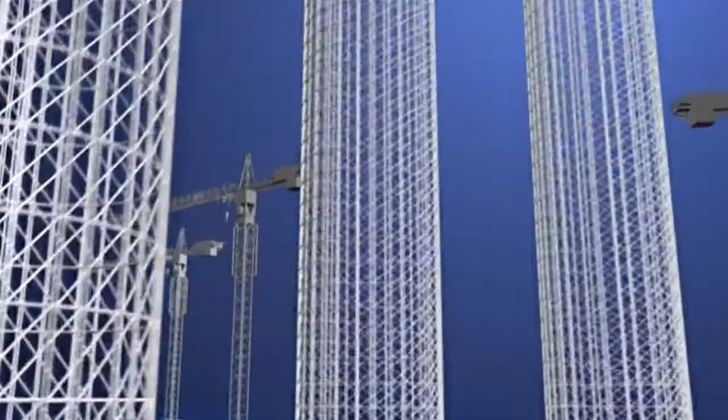Singapore, the Southeast Asian country, is smaller than New York City. The lack of space forces it to build its largest leisure and entertainment hub to date on a small tract of reclaimed waterfront land. The Marina Bay Sands. It's not one megastructure, but many. Serious challenges lie in the array of buildings that form the unique complex.

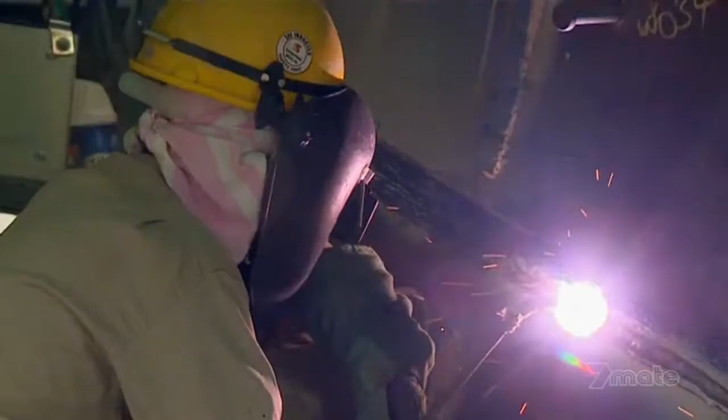3 55-story hotel towers slope at such great angles, they're in danger of buckling under their own weight. An even bigger problem is the hotel's roof. A 340-metre sky park spans its length, containing gardens, outdoor pools, and the world's largest cantilevered observation deck. But how do you build something as big as an aircraft carrier, 200 meters in the air?

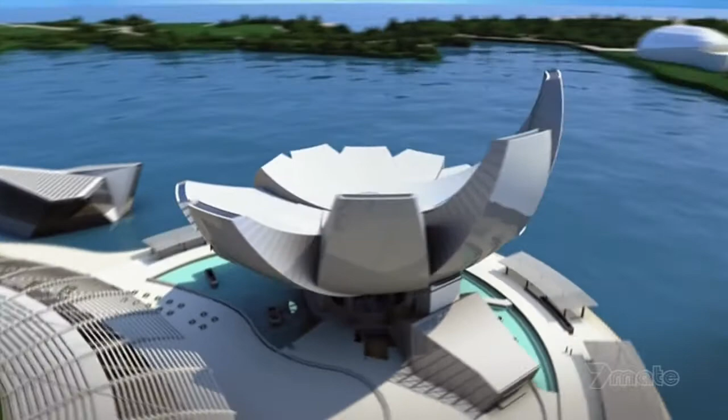In the hotel's atrium, mammoth works of art have to be somehow incorporated into the architecture. Its challenging centerpiece, a 15-ton mass of steel by a renegade artist from Britain. A 60-metre tall art science museum is designed for maximum visual impact. It will be to Singapore what the Opera House is to Sydney. Only one problem. It seems too impractical to construct. And a set of dramatic glass-encased pavilions, while themselves pose little challenge, have to be built in water.

The man behind the Marina Bay project understands the risks, but he believes that anything short of astounding will fail. Sheldon Adelson, one of the world's richest men and CEO of Las Vegas Sands Corporation. What we hope to accomplish is to change the face of Singapore tourism. So we expect a very successful development.

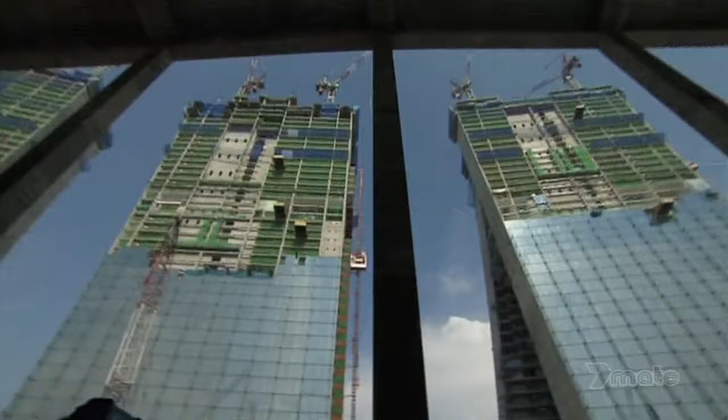That is by far the largest and most expensive single project we've ever undertaken. It'll cost about 5 to 5.5 billion US dollars. It's a lot of money. Now, I know $1 billion doesn't buy what it used to, but by any measurement, it's a lot of money today.

Adelson believes his huge investment is safe in the hands of Moshe Safdie, a world-renowned architect. Safdie is recognized for his use of dramatic curves and geometric patterns. The Marina Bay complex will be his largest and most difficult project yet. I think that architecture has to be timeless. Therefore, what it espouses, what it provides, needs to be something that has a long life.

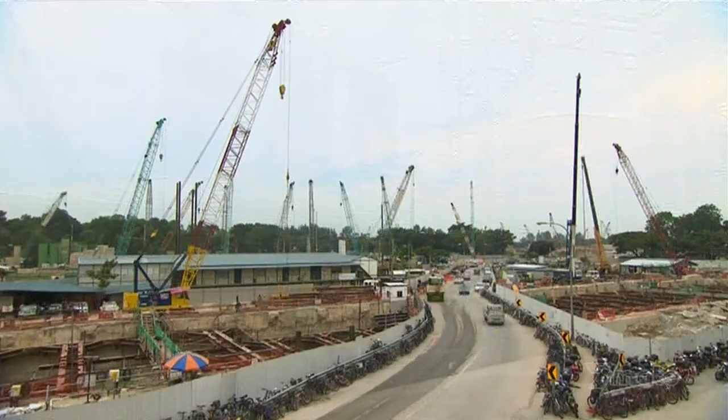What's unique about Marina Bay is all the pieces coming together. You can't think about it as individual buildings. You've got to think about it as a piece of city. It's much more a symphony than it is a sonata. On the ground, engineers are more concerned about the reality of building Safdie's vision. This is the North Retail section area. 30-year veteran John Downs is in charge of overseeing the entire project.

The design is very, very diverse, and each component of the project is totally different from the others. For a project of this size, with the planning, with the design, with the construction, you'd be expecting somewhere between 6 to 7 years. Here is basically a 3-year turnaround.

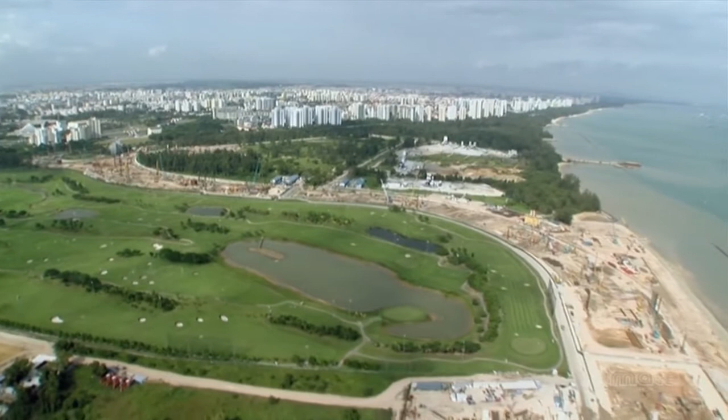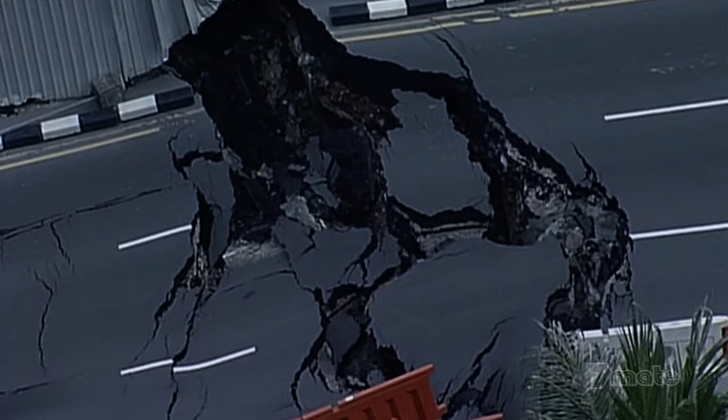Beneath the reclaimed land, which is essentially a seabed, is a dangerous layer of marine clay. Sometimes called black toothpaste, marine clay has very poor structural properties. If not given complete respect, the unstable marine clay is potentially fatal. In 2004, Singaporeans discovered the lethal consequences firsthand. A routine excavation in an underground tunnel for the mass rapid transit network causes a collapse, creating a gaping hole in the Nicoll Highway, killing 4 workers.

The ground conditions in which they were building the Nicoll Highway were not dissimilar to those we are encountering here. They had also soft clay. They had similar depths of excavation, between 20 and 37 meters. One of the big things that was learnt in the Nicoll Highway collapse was the importance of monitoring movements and the control of quality as the construction proceeds.

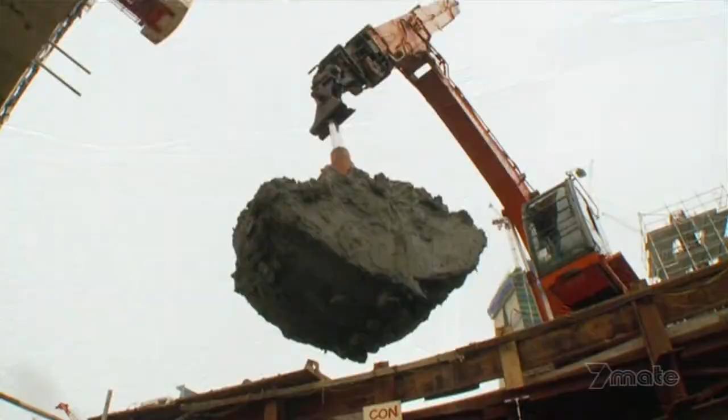Marine clay is an old foe of engineer Mike Barton. He's defeated it in the past by understanding how it behaves. The big problem with marine clay is that it is so soft that when you dig out the inside, the walls will move and potentially collapse and allow all the surrounding water in the bay into the excavation. So, before work can begin, the unstable building site needs major fortification.

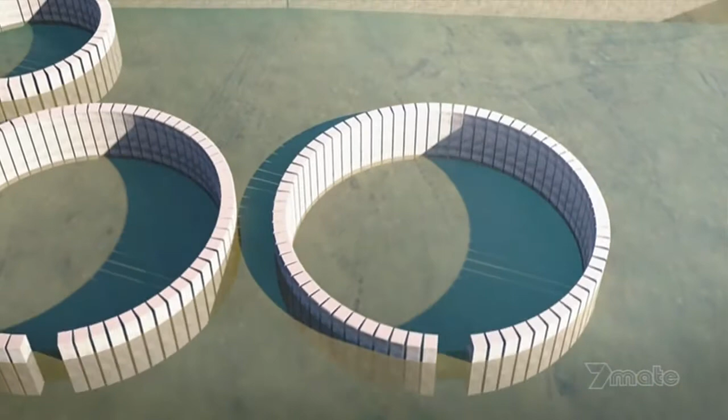To combat marine clay, engineers decide to build giant concrete walls to create stabilizing perimeters for the larger buildings, known as diaphragm walls. Up to 1.5 meters thick, diaphragm walls are steel-reinforced concrete sections, pounded 50 meters into the ground. They form watertight enclosures for men and machines to work round the clock. In just 1 year, over 4,000 meters of diaphragm walls help produce a rock-solid foundation.

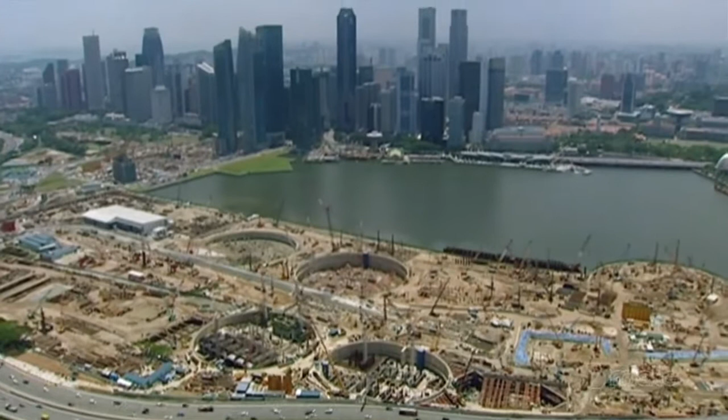The diaphragm walls that we constructed in a formation which we called a peanut formation, which is 2 circles joined together, and a donut formation, which is circular, are able to withstand very, very large forces from the marine clay without any movement. They encapsulate an area that's bigger than a football pitch that enables us to excavate very quickly and to build structure up very quickly.

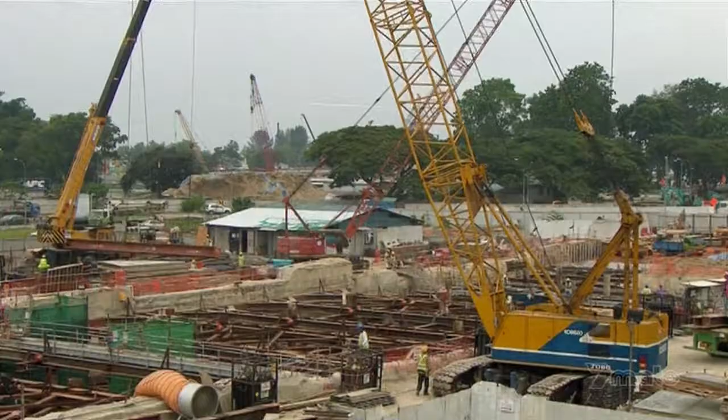Securing the footprint of the Marina Bay project has already taken a year out of John Downes' schedule. He now faces the difficult task of erecting the resort's many buildings in a space of just 2 years. Just managing the whole logistics of that, including the construction methodology, is very, very challenging for us. 1, 2, 3. To meet his tight deadline, Downes chooses the most direct solution. He hires 16,500 workers to construct every single building, simultaneously.

It's like leading a small army. So organizational excellence is key. We're just on the edge of Singapore in the CBD here, so rather than lose the contractors and the workforce to go off-site, we built our own 3-story project office. We have all of our contractors, our subcontractors here. We house our resident site staff. We have our project management team. We have our construction management team, our design management team, and the logistics here.

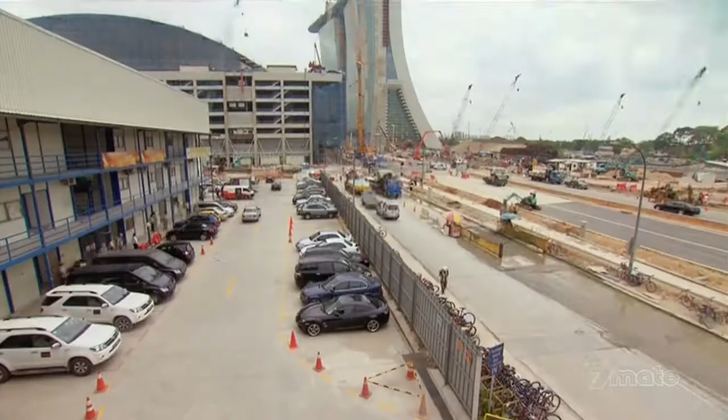Come lunchtime, the monster workforce creates another massive challenge for Downes. He responds by building one of the world's largest site canteens. We've got 13, 14 different food styles here. You can see by my shape and size that I eat here every day. I enjoy this food. So here you can see the project bakery. It has its own ovens. It's set up for breakfast. We cater for sandwiches during the course of the day. Can I take a sausage roll, please? So, freshly cooked food, straight from the oven. We stand by our products.

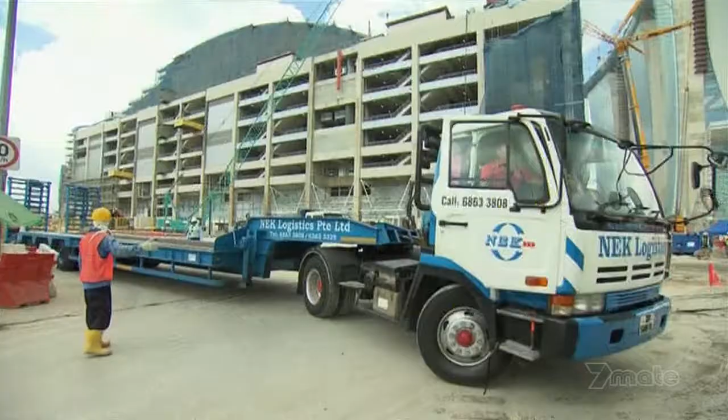The tight schedule also creates problems at the hotel towers, where engineers are already struggling with a congested site. The important thing to do is to make sure that they come in and deliver the goods straight away and then get out again. We don't want too many vehicles on site at the same time. To speed up construction and alleviate traffic congestion, engineers turn to a method that's proven itself countless times in the field: precast concrete.

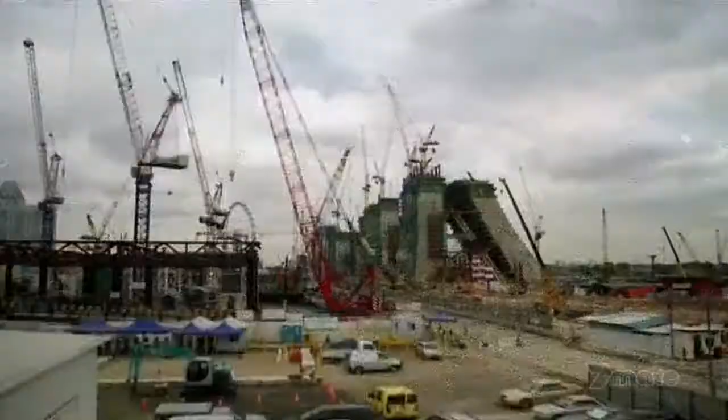Hotel walls are made on site in the thousands. And workers laying the floors are so proficient, they produce 1 floor per 4-day cycle. It's an impressive display for a conventional solution. But the structure they're attempting is anything but conventional. The key challenge of building the hotel towers is its unusual design. Unlike other skyscrapers, part of the towers slope at incredible inclines. Like a set of collapsing dominoes, the towers could buckle under their own weight if a practical building solution is not found.

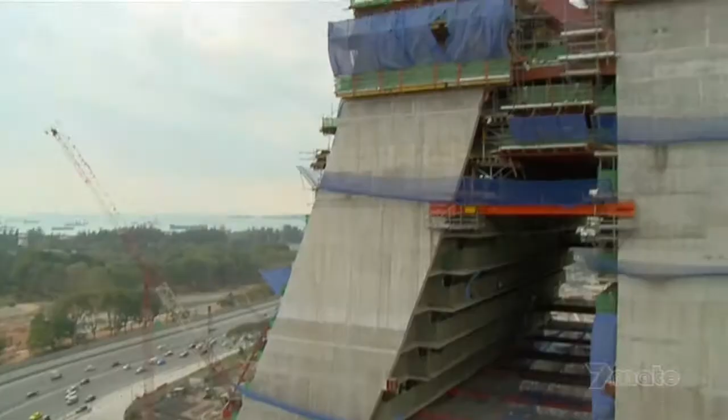It's a major concern for engineer Craig Glover. I've been in the industry for 25 years, done a wide range of projects in many different countries, but nothing compares to this whatsoever. There was nothing we could take reference from across the street, on the next high-rise, or across town. This is a new frontier. Costing a staggering $5.5 billion to build, the Marina Bay Sands could be one of the world's most expensive mistakes if engineers can't solve the tower's problematic structure.

Engineer V.C. Cheong leads the design team, and their solution comes out of left field. If you look at the configuration, it's not a straight tower. It's with a sloping leg. So this sloping leg is actually inducing a very huge external force onto the structure. We can't build it without any support. So we actually formulated a solution to prop up the sloping leg.

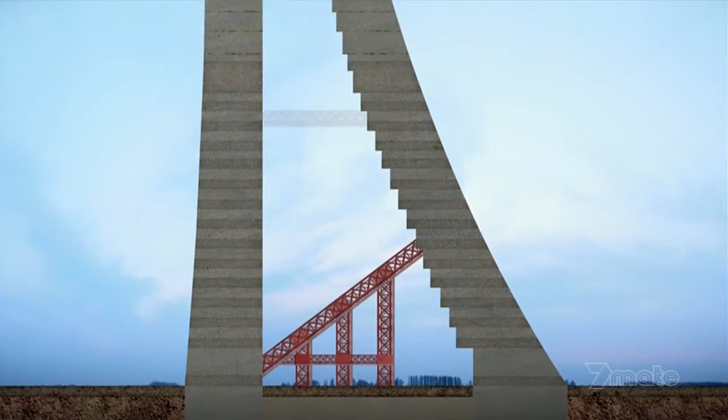Using a technique they've never employed before, engineers build large temporary struts made of strong structural steel. They prop up the sloping towers as they rise. Like a suspension bridge, high tensile steel tendons, also known as tension cables, give an added layer of support inside the walls. In theory, both the struts and the tension cables are temporary and will be removed once giant link trusses connect the towers at the 23rd floor.

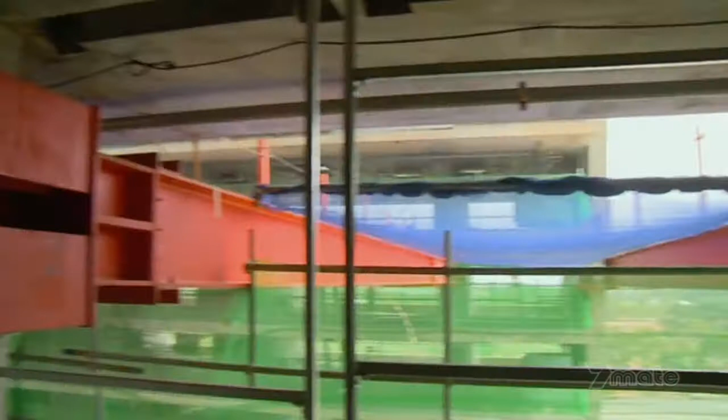The sheer weight in concrete is enough to topple the towers at level 8 if the engineer's calculations are wrong. To reduce the chances of failure, Glover and his team make a radical decision. Instead of removing the temporary tension cables in the tower walls, they make them permanent supports. I feel good it's in there because it's added strength, it's added support.

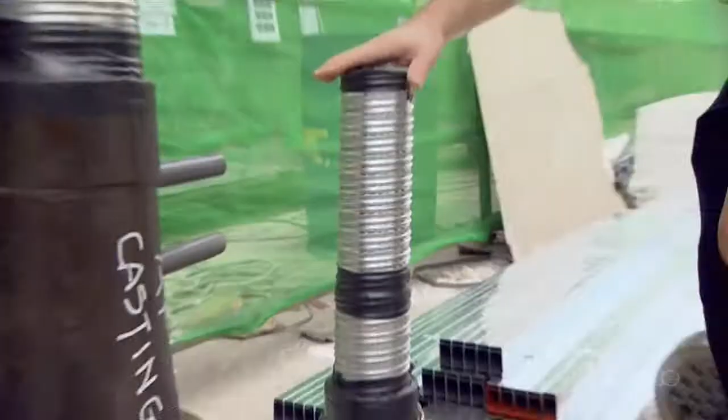We have a twined network here of high-strength steel, and what we do is we bundle these up so they form a cord with multiple strands inside this conduit. We place this conduit inside the walls prior to casting the concrete. So what we then do is once the concrete is cast, we anchor one end into the concrete. We then put a very high-strength pneumatic jack onto the collar and one by one pull these strands through and tension them up. What that does is basically pull the building back and hold it in place.

If these cables were to suddenly break or if they weren't in place, we wouldn't be able to control the self-weight as we build more and more of the building up. So it's a very important part of the actual engineering of the solution to hold the building in place until we can connect it.

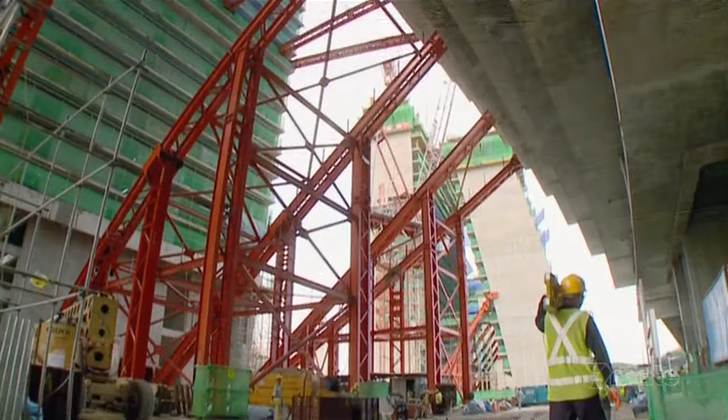Despite the team's quick thinking, the true test of their engineering decisions will only happen once the main support struts are removed and the massive link trusses installed. Link trusses are huge reinforced steel brackets that bind the towers at the 23rd floor. Once their installation is complete, they transfer the sloping tower's weight completely away from its temporary struts.

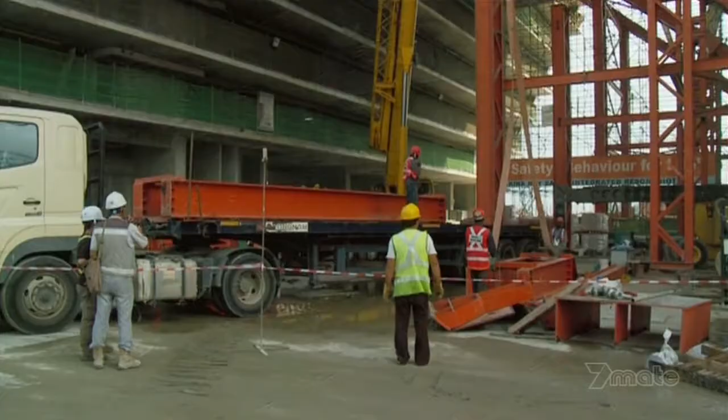Once we're satisfied that we don't have any stability issues, then we can bring the large hydraulic cranes in and member by member start to dismantle the struts. We've got a lot of time pressure, so we've just got to make sure that these things keep moving. It's done its job holding up the building, now it's holding up the job.

As the last pieces of support struts leave the site, Glover and his team can finally breathe a sigh of relief. The link trusses are holding the building load. So far, so good. It's a lot of theory, a lot of calculations, but until you really do it and really get it out of the building, you never quite know. I'm always waiting for the phone to call in the middle of the night that something's gone wrong.

Not all the structures have ended up according to plan. The 60-meter-high Art Science Museum is facing a major design overhaul. Planned as a venue for blockbuster exhibitions on the arts and sciences, its bowl-shaped roof doubles as a 3,000-seat amphitheater. Unfortunately for engineers eager to start its construction, architect Moshe Safdie isn't happy with its current shape.

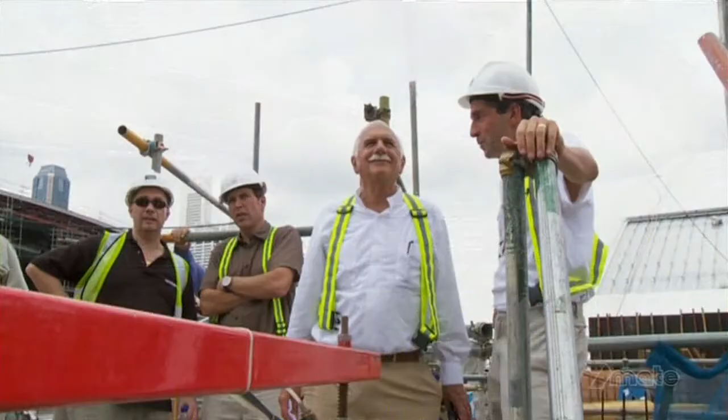Somebody looked at them and said, looks like a bunch of bananas. In fact, Mr. Adelson said, looks like a bunch of bananas. I said, well, if they look like a bunch of bananas, we're not there yet. And do the structural engineers have a preference?

It's terrible news for Safdie's design team, especially its principal, Gene Dyer. There are times that Moshe will come in with an idea. We think it's quite exciting. We'll pursue the idea for weeks or even months. He'll come back and say, I want to change the idea. And we've already bought into the idea, so it's a bit frustrating.

To rework the unique geometry and dimensions of the Art Science Museum, Dyer and his team turned to advanced 3D modeling programs. It not only makes navigating the museum's complex geometric patterns easier, it shortens the process to a matter of days. The model is dynamic and it can be moved by just changing one or two elements. Moshe could experiment. He could make rapid judgments in a very short period of time about which way he wanted to take the project. This is a process that was impossible to do 10 years ago. Without the computer, this would take years and years and years.

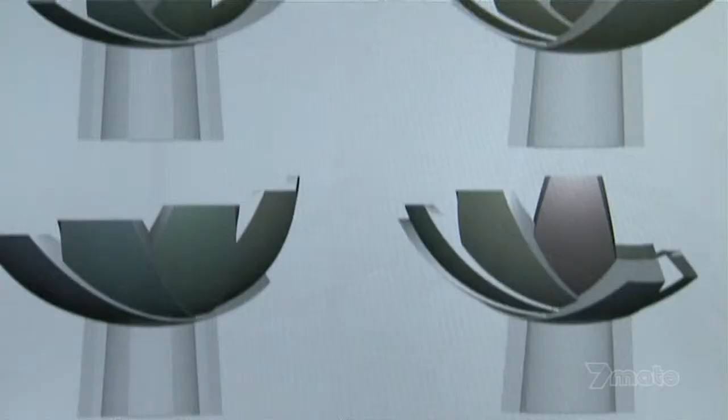Nautilus form effectively became... To rationalize the new look into a buildable structure, architect David Robbins splits the museum into spheroid segments. We began to look at using different spheroids to define the different upper and lower surfaces of this building. That gave us a very rational way of describing the plan form to our clients.

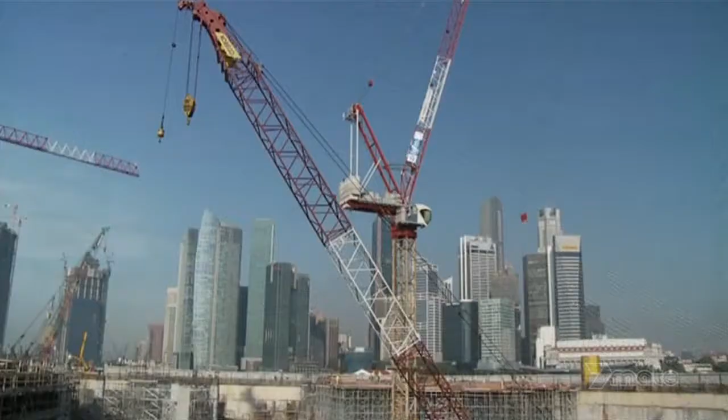After months of refining the design, Safdie is finally happy with the result. The mathematical precision that we gave them made them even more beautiful. It led some people to say, well, hand of welcome. Others said, is that a lotus? And the more ambiguous the associations, the closer I thought we were getting to our target. Because I think the least exciting buildings are those which have overt symbolic associations.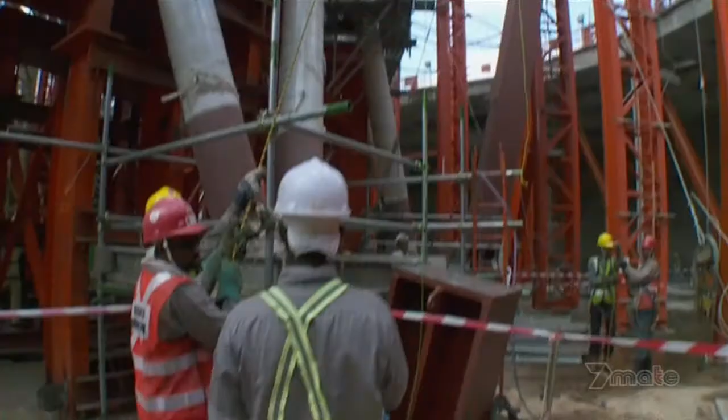Armed with the new design, engineers begin work on the museum's 60-meter-high superstructure. A staggering 5,600 steel elements weighing some 5,200 tons are prefabricated to exact specifications. They are then trucked onto site and assembled. It's like putting together a giant jigsaw puzzle. Each element has to be installed with pinpoint accuracy. If it's even a few millimeters off, engineers will have to start from scratch.

Engineers of the massive atrium at the base of the towers are facing an equally tough construction process.

Safdie has come up with a challenging design. He wants to inject art into the atrium's architecture so that visitors will feel like they're walking through a grand Gothic cathedral.

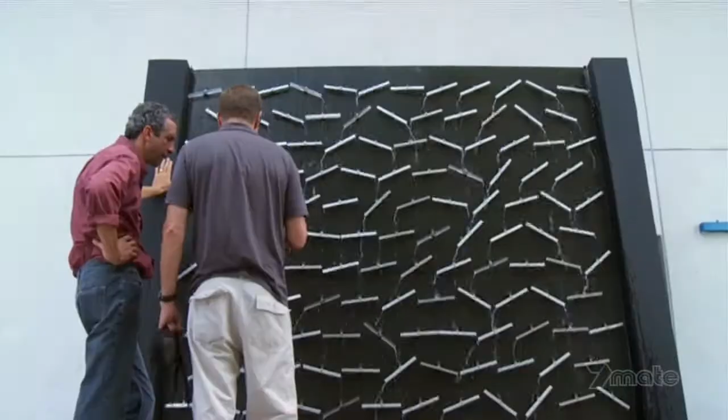In medieval times, if you think of a Gothic cathedral, there's the architecture, there's the stained glass windows, there's the sculptures on the pinnacles. You cannot draw a line and say art and architecture. Art and architecture are one, they're singular experiences. And I think what we try to do here is come back to this integrative mode.

To create the centerpiece of his vision for the atrium, Safdie commissions renowned British sculptor Antony Gormley. Famous for his unusual approach to art, Gormley is the brains behind the Angel of the North sculpture in northern England. What he's about to attempt is proving to be more of a construction challenge than an artistic one.

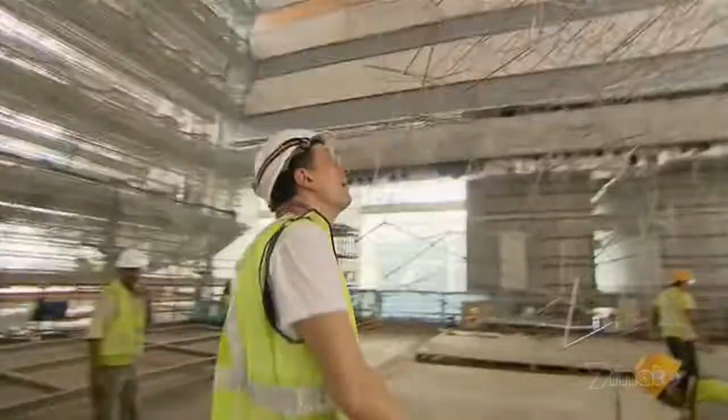A cloud-like sculpture some 40 meters long, made up of 15 tons of high-grade stainless steel, hung 12 stories above the atrium. The Angel of the North is, in a way, making a very traditional public sculpture because it's isolated in space at the edge of a valley. You can see it for miles and miles. It's very much about occupying space.

This is about activating space. You can't see it for miles and miles. You have to be in the space with it. Each viewer, every person coming out of their hotel room will confront this big chaos thing and have to find their place in it. I think that's an exciting thing.

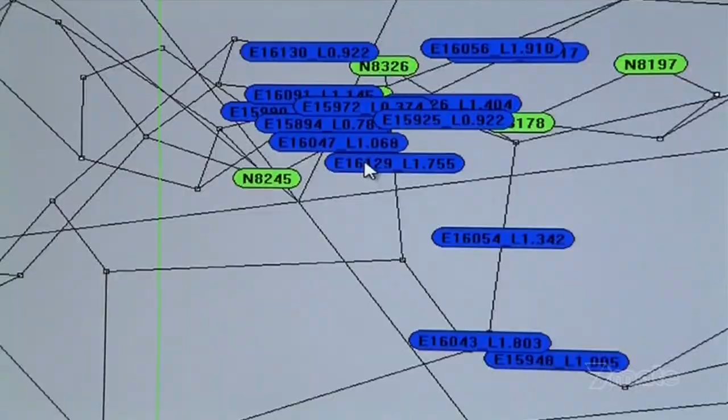Called Drift, Gormley's steel sculpture is so huge and so complex that it can't be sculpted using traditional methods. Gormley's team has to create state-of-the-art 3D computer programs that translate his ideas into buildable plans. But just as they're about to begin construction, a bombshell drops.

September 2008, a global financial crisis wreaks havoc on markets. The flow of the hundreds of millions of dollars that keep the Marina Bay project going every month suddenly stops. For engineer Matthew Pryor, it's a massive blow. I feel devastated. I mean, it couldn't be worse. Probably the worst day of my life professionally.

There's no more money coming through. So unless we put some funding in place or there's something, we're going to have to shut the jobs down. But there's a tough decision to be made, and we don't know what we're going to do just at this point in time. With the future of the multi-billion-dollar project plunged into doubt, all eyes turn to the man behind it, Sheldon Adelson. The next move of one of the world's richest men will determine the fate of the mega construction site.

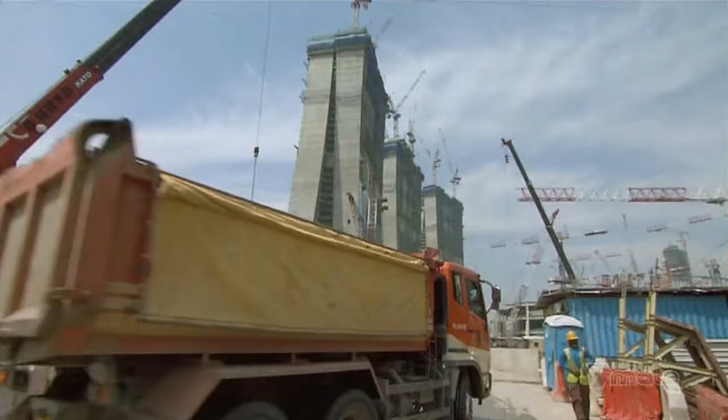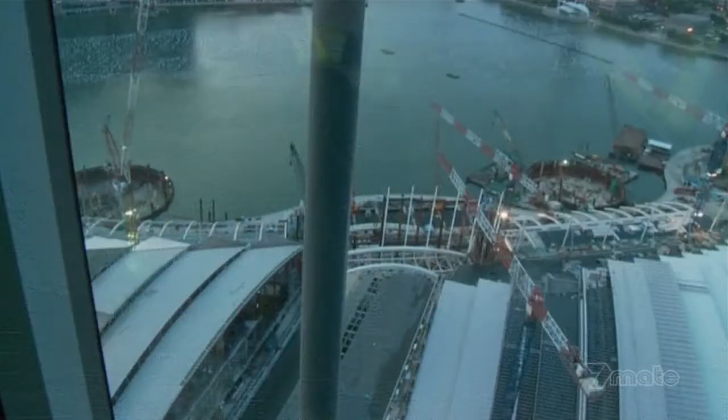The 2008 global financial meltdown is a haunting echo of the 1990s Asian crisis. Back then, progress on Shanghai's World Financial Center came to a complete halt for 5 years. For Adelson, that's simply not an option for the high-profile Marina Bay resort. His vision of changing the face of Singapore tourism is at stake. And so are billions of dollars of investment from his Las Vegas Sands Corporation. He prefers finding a stopgap solution to weather the storm.

Throughout history, there has never been a trend that went straight up, nor a trend that went straight down. So it goes up and down. It's only a matter of time when things will recover. In a bold move, Adelson pledges his vast personal wealth to the completion of the project, effectively ending any speculation of failure.

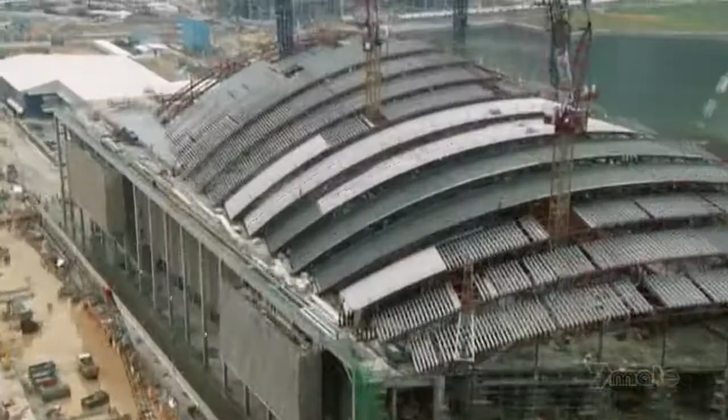There's a massive sense of relief in the company. I mean, everyone pleasantly surprised how quickly we've got through this and the fact we could hold it together and get it going again. So euphoria is probably the best way to describe it. With the crisis averted, construction on the 3 55-story hotel towers, the casino, theatres and convention centre resumes at pace. Everywhere you turn, steel is being installed. It's vital reinforcement for every concrete structure on the 15.5-hectare site.

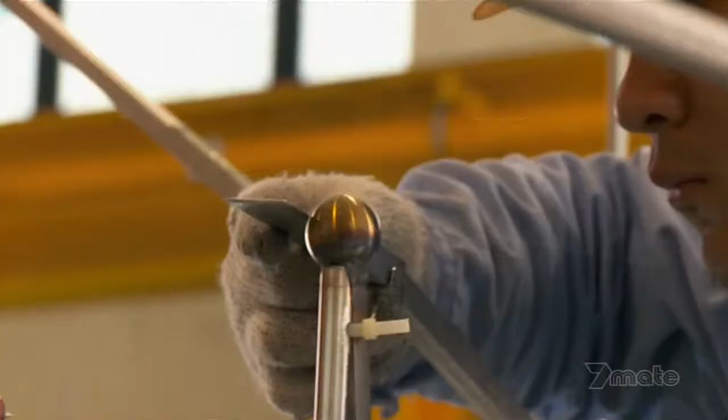For one project at the tower's atrium, steel is more than just reinforcement. To construct the 15-ton Drift sculpture by British artist Antony Gormley, engineers had to first laboriously prefabricate it into over 70 segments. The segments are then welded into 8 slices and will ultimately form the sculpture. It's a tricky operation, but engineers are able to complete it swiftly due to a system of codes and numbers that enable them to quickly identify what goes where.

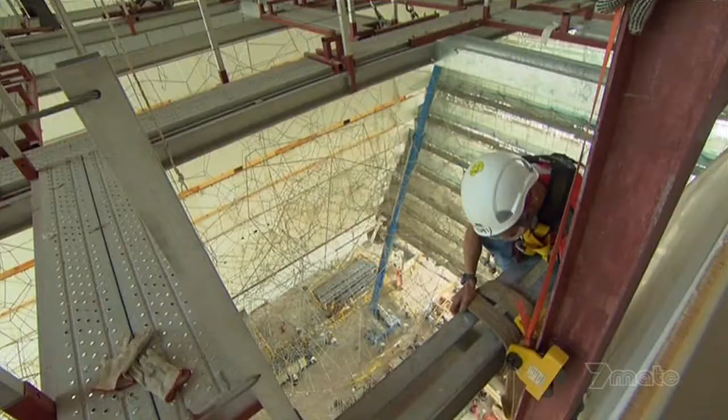Once all 8 slices of Drift are fully assembled, it's lifted up into position by a temporary lifting frame. A massive box truss on the atrium ceiling then takes over the load. In theory, the box truss will support the weight of the lifting frame as it's being lowered down. It will be a heart-stopping moment, especially for engineer Graham Stevenson. The lifting frame is about 9.5 tons, so when it picks up and gets some momentum, there's a potential that it just wants to flick over and rotate through its full 90 degrees, and we won't have it under control.

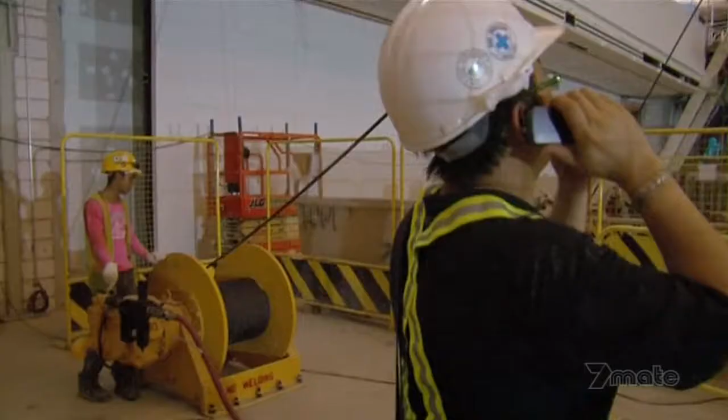Stevenson's solution: 4 powerful automated hoisting drums located at the 4 corners of the frame. They allow workers to control the strength and speed of the operation with high tensile steel cables. A spotter at the top determines the pace of the procedure and marshals the team. With their preparations complete, it's time to face the moment of truth. Sculptor Antony Gormley is as anxious as any of the team.

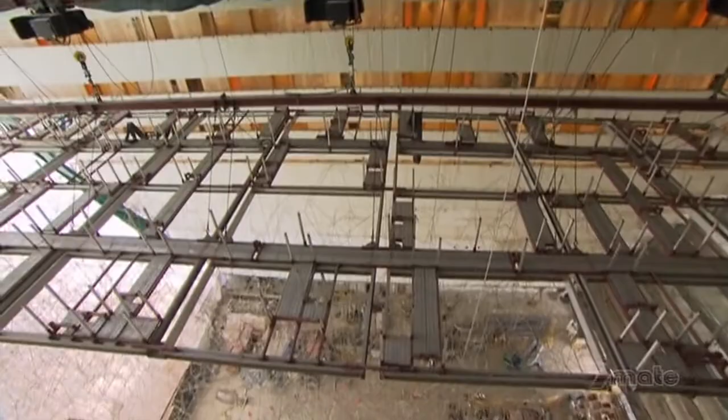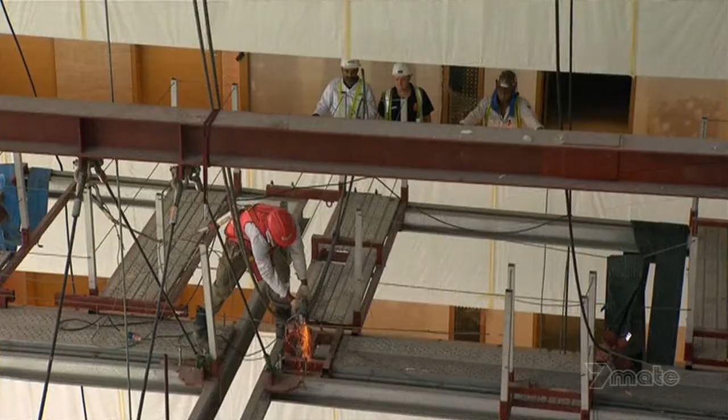The entire operation is estimated to take up to 10 hours to complete. As soon as the frame is in motion, there's no turning back. Midway through the lift, Stevenson receives reports of a potential problem. 22-story, number 7 temporary cable, scaffolding touching the cable. Why you got the temporary cable touching to the transverse? Yeah, but is it just the end of a tube? Yeah. So you can just cut the tube? Yeah. Problem solved.

But what was previously an estimated 10-hour procedure now turns out to be a 24-hour marathon lift. At 6 a.m. the following morning, they complete the job. Absolutely fantastic. The Gormley is now finally in its final position, so really an end of a long and exhausting day, and big thanks to everybody, but it's finally done.

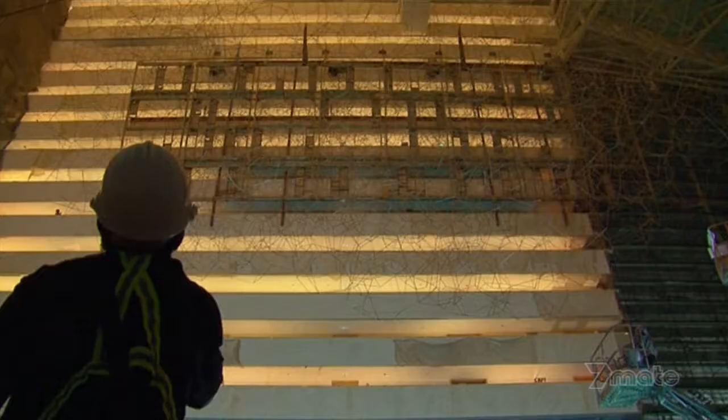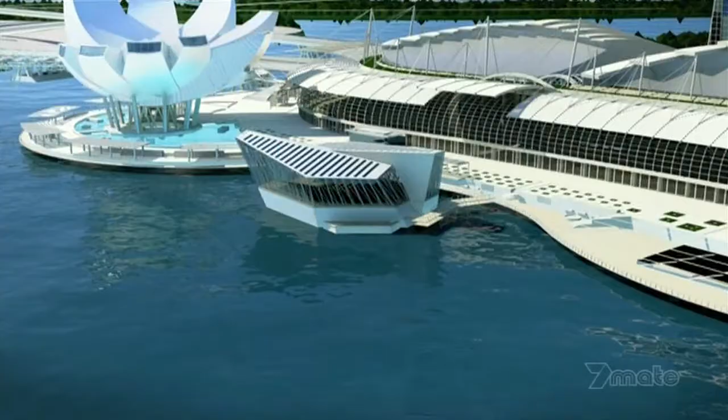While the drift settles into its new home at the hotel atrium, elsewhere, attention is focused on one of the project's key features, the Crystal Pavilions. The two glass-encased buildings by the promenade are set to be the resort's premier shopping and entertainment complexes. But before engineers can make them a reality, they have to secure their footprint. And already a major obstacle threatens to sink their objective. The Crystal Pavilions are situated within the confines of Marina Bay. So to found it, engineers have to find a way to build in 6 meters of water.

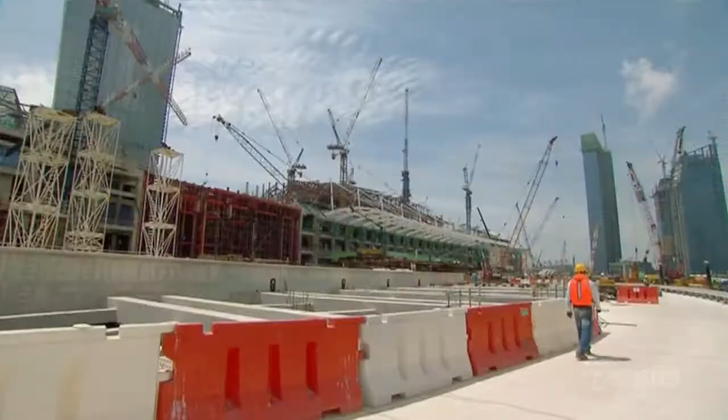The responsibility of tackling the problem falls on the shoulders of engineer Kurt Vella. I'm from Sydney. The underlying foundation in Sydney is sandstone, it's rock. All you need to do is just dust off the surface and you can build skyscrapers on it. Here it's very different. All the structures have to be heavily founded. To keep water out of the construction site, only one solution seems viable for Vella and his team. A waterproof steel structure called a cofferdam. This temporary formation surrounds the worksite with a circle of steel sheet piles, creating an impenetrable shield that locks out the water, keeping the workers safe within.

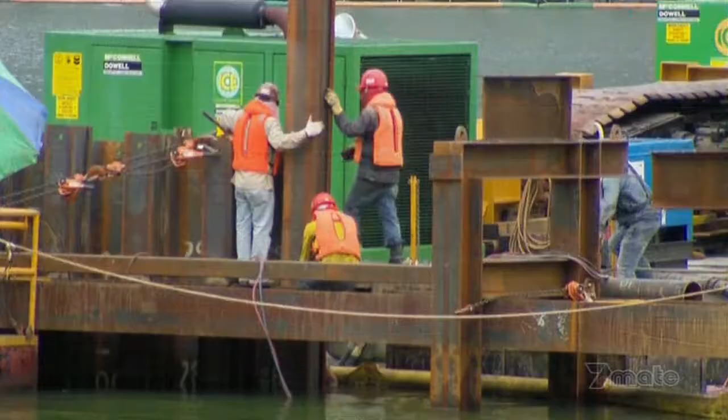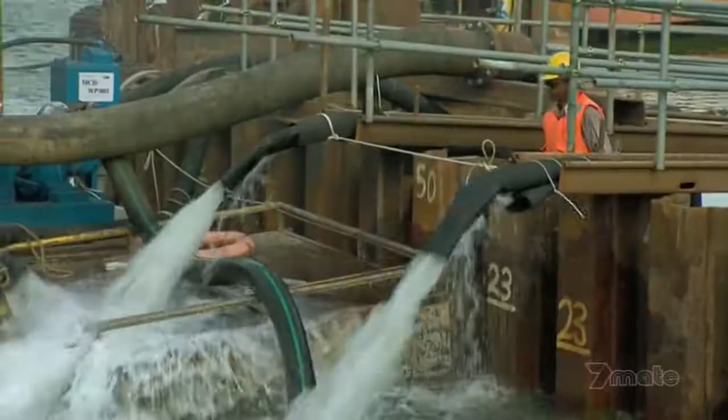For the job, they rope in a 12-ton vibro hammer. It punches the sheet piles deep into the earth, making the cofferdam rock solid and resistant to movement. With the cofferdam secured, engineers deploy powerful diesel pumps and run them 24 hours a day, ejecting any water that remains within the walls. This last step comes with inherent dangers. The force of the water outside creates what engineers call hydrostatic pressure. In theory, it's powerful enough to force water through any gaps in the cofferdam. It's something that Vella prays will not happen.

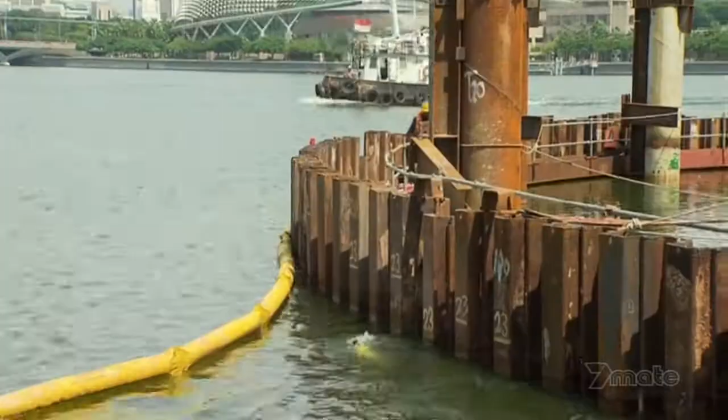There's a bit of hesitancy and concern because we've got to build this building in the middle of Marina Bay. Everybody can see what we're doing, so if it leaks, it's a problem. If it fails, if it moves, if it collapses, it'll be an absolute catastrophe. After a day of pumping, Vella's worst fear comes true. Parts of the cofferdam are leaking. To rectify the problem, Vella orders a team of 8 divers into the water on 10-hour shifts. Their mission? Find out where the water is being forced in and plug them shut with epoxy resin.

Anson Lee is an 8-year diving veteran. The toughest part of our job is the environment. The visibility is poor here. It's totally zero. I cannot see anything here below. I solved that by feeling the suction and then feeling out the thing. You have to overcome all the fear that you can't see under the water. But okay, I feel proud to be one of this team to build this thing out.

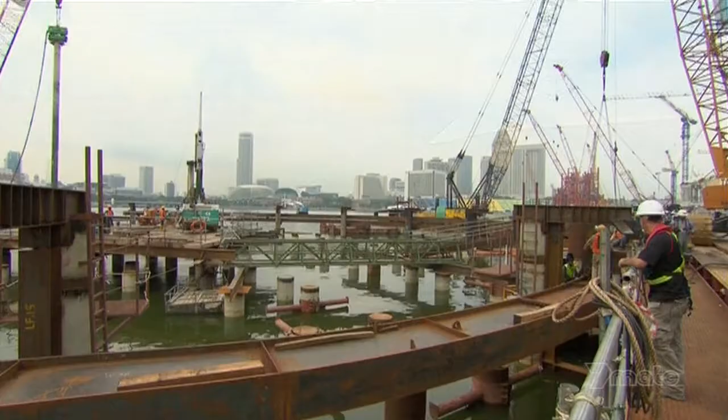After 2 weeks of hard work by divers and the pump crew, the job is finally complete. Kurt Vella can also breathe easy. Every job is different, every job has its challenges. You plan and prepare, you try and identify your risks in advance, and you try and come up with contingency plans. And that's what's really enjoyable from my perspective. That's what gets me out of bed in the morning.

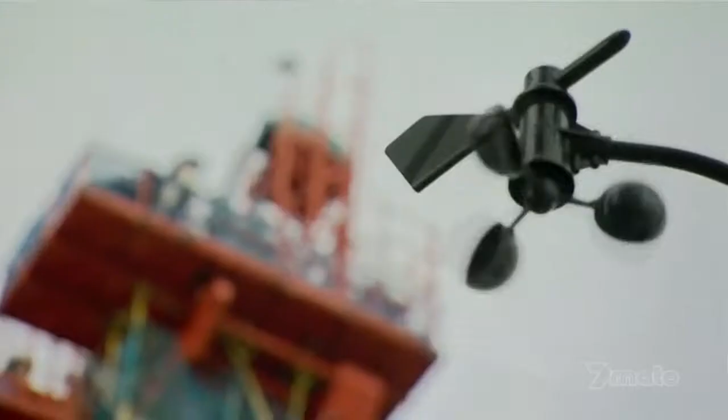After 2 years of battling the elements and overcoming difficult construction milestones, the 3 sloping towers of Marina Bay Sands can finally celebrate their topping off ceremony and move on to the next phase. But a destructive force of nature threatens to throw a spanner in the works. With climate change predicted to affect the pattern of Southeast Asia's typhoons, Singapore may one day experience the destructive tropical storms plaguing its northern neighbors in the Philippines and Taiwan.

When that happens, typhoon-force winds could spell disaster for the hotel towers, especially the 340-meter sky park sitting on top of it. The force of the wind can make both buildings sway dangerously, causing irreparable damage to the structures.

The Sky Park, offering 360-degree views of Singapore. The visionary design will have enough surface area to park 4.5 Airbus A380s. But when architect Moshe Safdie first mooted it, it stemmed from a purely functional need. Luxury hotels, as we think of them, always have lots of open space around them, gardens, at least in the kind of tradition. But we didn't have much space left.

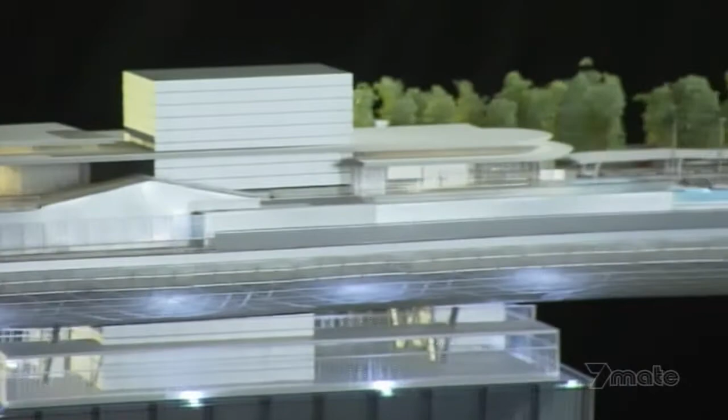And at that point, I figured, well, if we cut out of an extrusion of foam the kind of slab that goes over those 3 towers, and we placed it there, and we said, well, what do we have here? My God, that's some park. And so that's where the idea was born. That's what makes us a resort.

Safdie's revolutionary idea scores points for ingenuity, but it clearly isn't what nature intended. Typhoon-force winds threaten to rock the towers and its sky park, causing unimaginable damage. If engineers are to make the building a reality, they'll need a rock-solid solution.

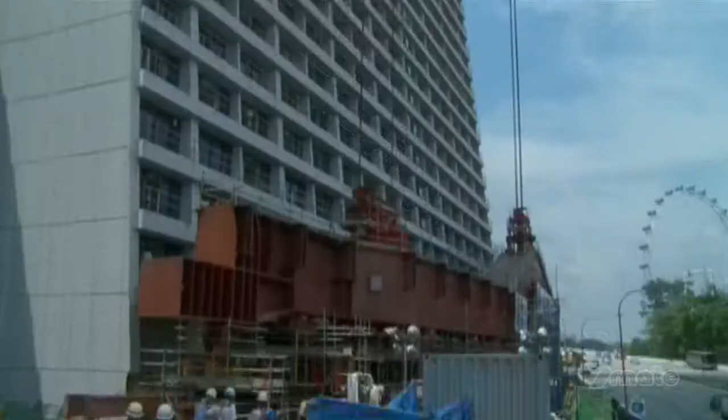Still got to do all this cladding. Engineer Tony McKee has little time to make things happen. At the moment, we're running a couple of weeks behind what we'd originally planned. We're not entirely happy about it, but at the end of the day, we've got to do this safe and we've got to do it properly. You're safe close to the...

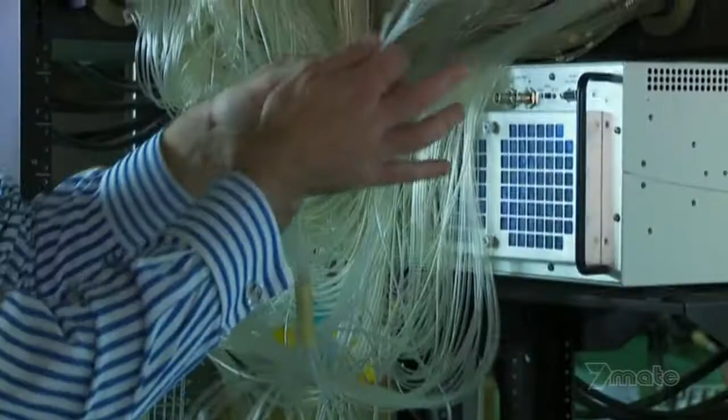To fight the enemy, McKee knows he has to first understand the enemy. He hires leading US wind engineers CPP to carry out extensive testing on the towers and Sky Park. Their mission? Find out how Singapore's potential wind forces affect the buildings. We turned that upside down. Wind engineer Roy Denoon oversees the process at their state-of-the-art wind tunnel in Fort Collins, Colorado.

The thing that makes this really special is the fact that we have this sky park running across the top, linking all the towers together. So whereas normally with a normal tower, we'd measure the loads on the tower in isolation, with this one, what we're needing to do is to measure the loads on all 3 of the towers at exactly the same time. So that way we can know how the towers are going to move relative to each other, so we can make sure that they're not going to put excessive strains or movements into the sky park.

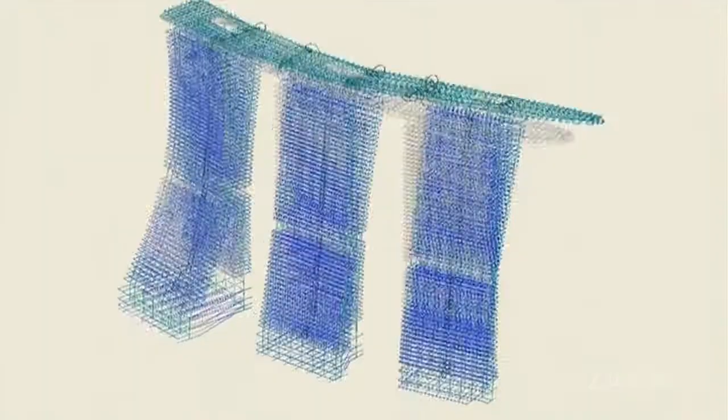During the tests, a scale model of the Marina Bay Sands towers is blasted with 40-kilometer-per-hour winds to simulate faster typhoon winds in reality. Over 1,000 pressure-measuring instruments inside the model register how the winds affect the buildings. At the end of the tests, engineers confirm that the 3 towers can deform by some 200 millimeters during the fiercest storm.

Engineers quickly figure out a solution: movement joints. Inspired by bridge engineering philosophy, movement joints are essentially gaps located between the concrete towers. The huge gaps allow for movements of up to 250 millimeters. Aluminium and stainless steel plates act as sliding components. They can move back and forward over each other, a little bit like you'd see in a flexible bus, where you have that articulation happening in the middle. It's a similar concept to that.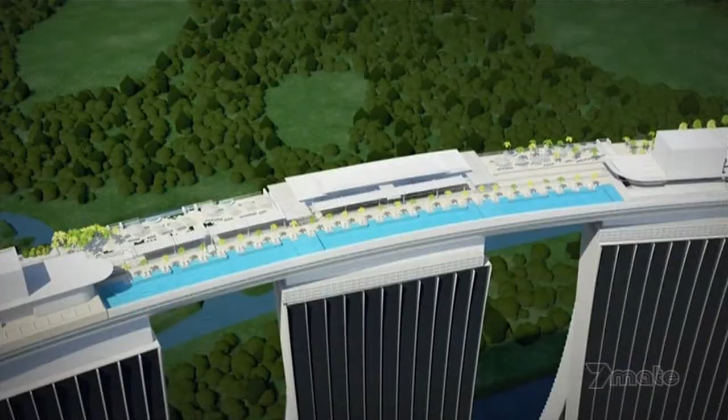With the help of US pool builders Natare, McKee quickly develops a solution, but it's completely unproven. A secondary system of movement joints built into the pool itself. The plan, to split the pool into 3 smaller 50-metre units. Steel top hats then conceal the gaps. Huge basins catch any runoff pushed up by the moving pools. McKee knows he only has one chance at making this work. So he commissions a trial by water.

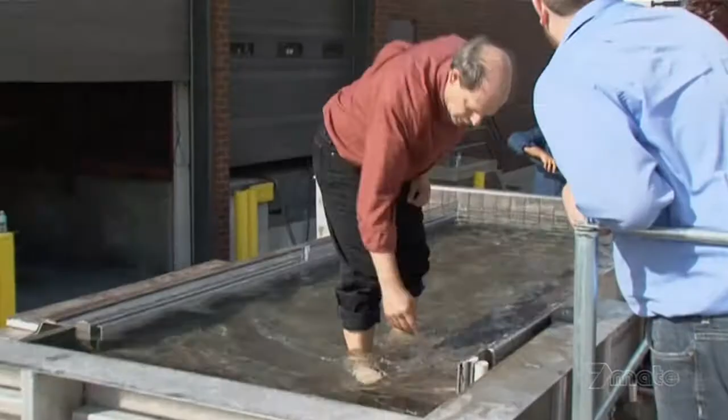What we've got here is the side of the swimming pool, which replicates the movement that we're going to get between the towers. And what the Natare guys have come up with here is a simple track system which can be pushed back and forward by a forklift. And that replicates the full range of motion that we have on the swimming pools, which can be 0 to 250 millimeters either way.

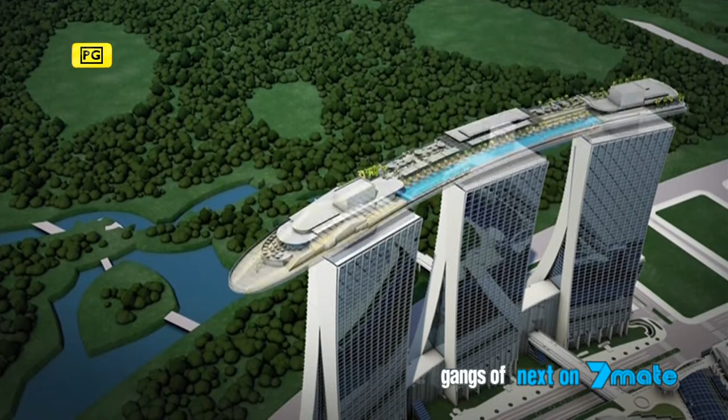It takes engineers weeks of testing before they're completely satisfied. Consisting of some 10,000 tons of steel, the Sky Park is as big as an aircraft carrier. The most practical way for engineers to construct it is to break it into 14 segments on the ground before assembling it at the top of the towers. There's no room for miscalculation at 200 meters in the air.

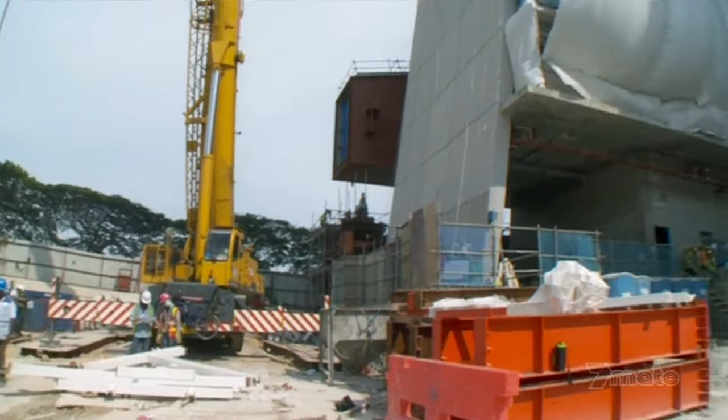Each segment is carefully prefabricated and tested by steel specialists Yongnam, and then trucked to the site independently. From the very beginning, McKee and his team anticipate that their biggest challenge will be lifting the 2 largest segments of the Sky Park, the box girders. Measuring 80 meters long, their combined weight is a staggering 1,400 tons.

How do we feel? A little bit of apprehension. You know, it's a significant lift that hasn't been done before. If something goes wrong, it could be really significant for us. To reduce risks, McKee turns once again to proven bridge building technology. In a process known as strand jacking, giant temporary lifting gantries made of strong structural steel will use powerful hydraulic jacks to lift the box girders up to the top of the towers before sliding them into place.

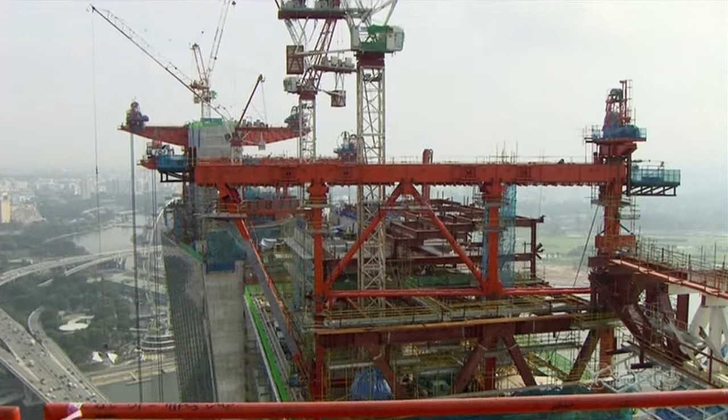It will be the longest and largest lift of its kind in the world, and McKee needs the best in the business. He puts a pioneer in the field in charge: Swiss-French company VSL. Engineer Eddie King and his team have successfully raised bridges, stadium roofs, and even Ferris wheels. The toughest part of my work is you have to plan everything very precisely, because everything is set up in millimeters. So we have to lift up and slide it in and position it in 5 or 10 millimeter accuracies. If we don't do it properly or safely, the biggest hazard is the thing can fall down to the ground.

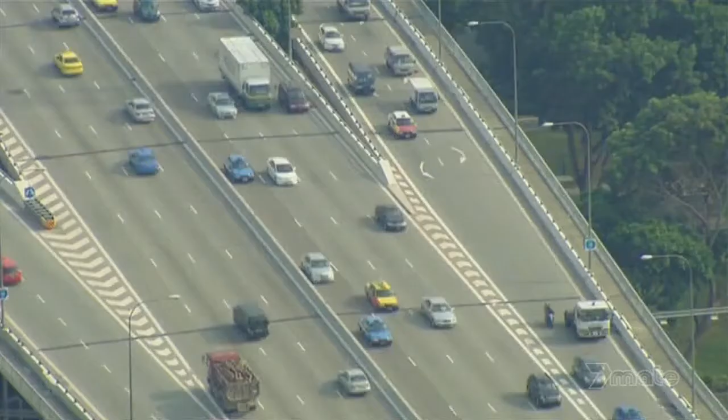Other factors further complicate the lifting process. Due to an increasingly tight schedule, the team is forced to conduct the lift during Singapore's annual monsoon season. It's almost impossible to predict when a tropical storm will hit. When it does, the accompanying lightning strikes can endanger lives. And because the whole operation takes place meters from a jam-packed highway, curious onlookers will be able to see any mistakes the engineers make. It's a potential public relations nightmare.

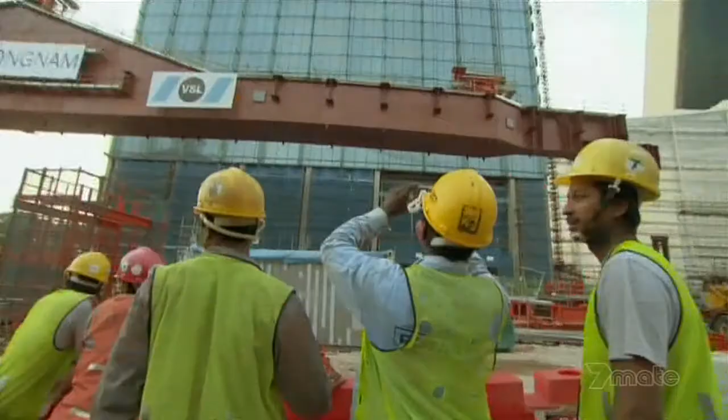Worst case scenario, we get stuck. And then we've got to figure out how to release it, how to continue lifting, because basically once we get going, we keep going. Okay, now I stop down. During an estimated 16-hour lift, the box girders will move at a cautious 14 meters per hour. Eddie King and his team constantly check their weather gauges for any incoming storms. The hydraulic jacks are also inspected regularly for overheating. No one wants the operation to stall in mid-air.

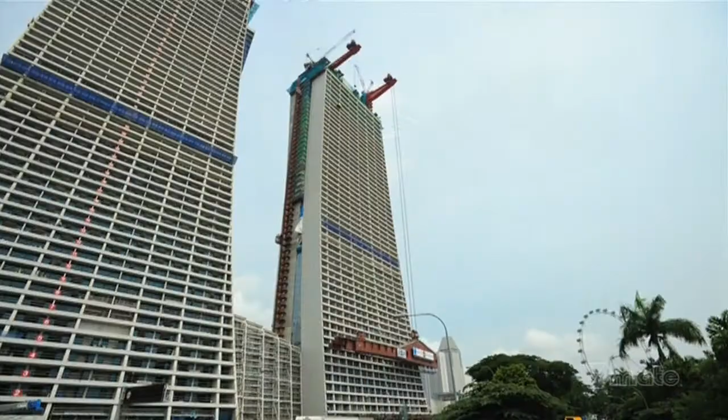Despite the team's best efforts, Mother Nature catches them by surprise. Okay guys, rain is coming. It's better we stop here. An approaching downpour threatens to grow into a lightning storm. We are at 200 meters above and surrounding buildings are quite far away. So there's a chance of the lightning striking on the high point like this. So we've got to stop and wait until the weather gets better before we continue our lift. McKee's worst fear comes true. If the girders remain stuck at midway for too long, he will have to order them down.

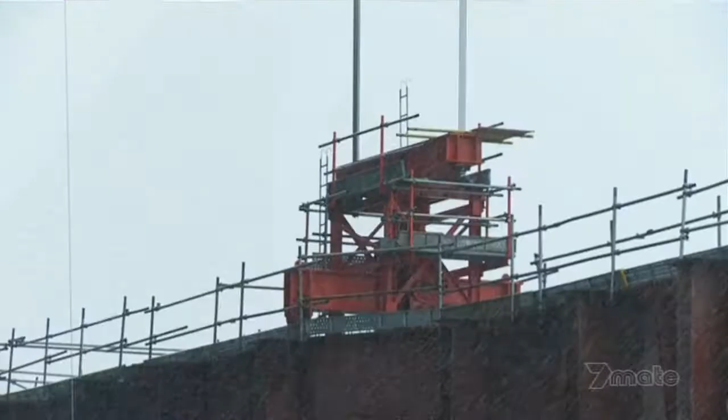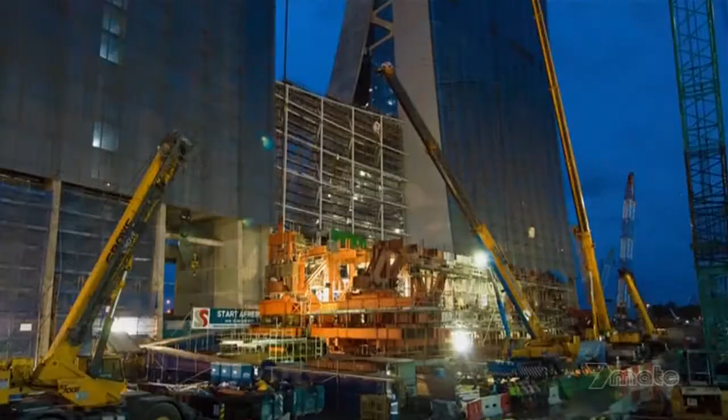Okay. After a tense 3 hours, the lightning threat passes, and the operation cranks back to life. By the time the box girders slide into position, it's past midnight. Everything went quite smooth today, so we hope tomorrow we can do the same smoothly, bring it in and transfer to the permanent position. With the lessons learned from the box girder lift, the rest of the segments go up smoothly.

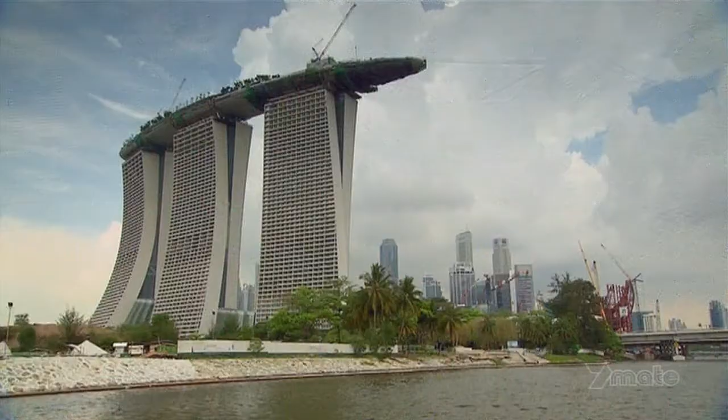As the final piece rises into place, Singapore is already marveling at the team effort behind one of the world's most ambitious building projects. In just 3 years, engineers overcame seemingly impossible construction challenges, defeated marine clay, engineered ingenious design solutions, and survived the most debilitating financial crisis since the 1930s. As the finishing touches are put on the resort, the stage is set for an opening party, Singapore style.

Those involved reflect on the project that has already far surpassed their expectations. It's a bit kind of overwhelming, you know. I'm in the process of disconnecting the umbilical cord. It's not easy for an architect. This type of project probably only comes around every 25 years or so. So it's been a lot of hard work, extremely challenging. I really can't imagine, I couldn't list the number of challenges we've overcome along the way to get to today.

Everybody is saying this is kind of a miracle, you know, never seen anything like it. And it's rewarding, it's nice. The Marina Bay Sands, Singapore. Proof that with visionary design and engineering know-how, megastructures can still defy the odds and fulfill the wildest dreams.